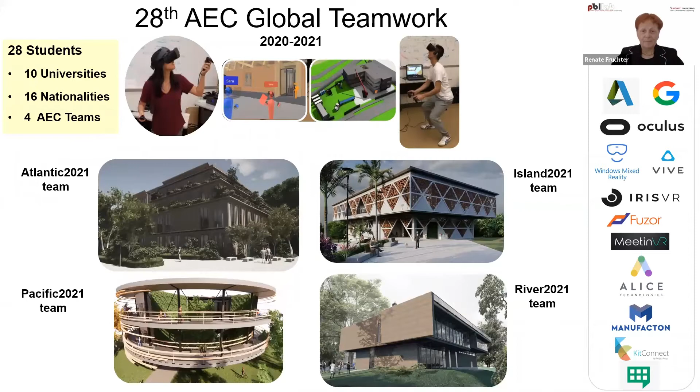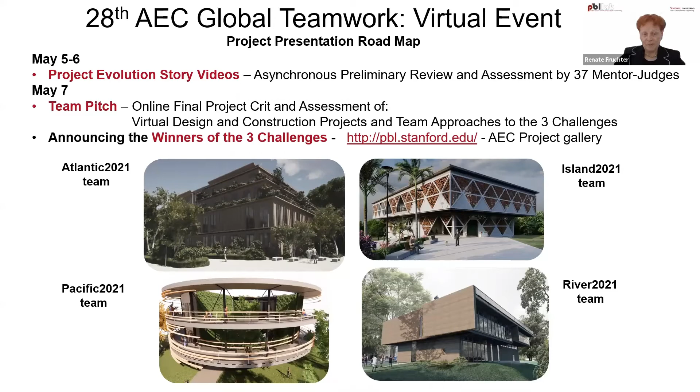In preparation for the virtual event, all 4 teams prepared project evolution story video presentations that were asynchronously reviewed and assessed by 37 AEC industry mentor judges. All teams then gave a TED-style short team pitch online to discuss their solutions with the mentors. To view all team presentations, please visit our PBL AEC Project Gallery website. I hope you will be inspired.

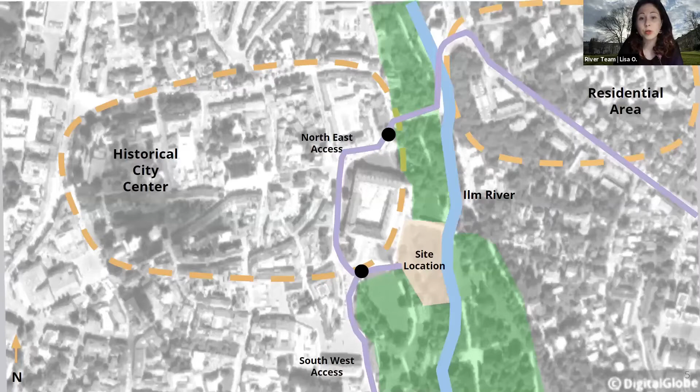However, this challenge encourages us to develop a small kit of parts with given dimension restrictions. The fact of the shallow water table was solved by using self-drilling micropiles and a waterproof concrete slab for the foundation. And by creating an earth embankment, we were able to bear the risk of flooding.

Our site has a breathtaking view to the river and the park. It is quite extroverted with a good connection to the other university buildings.

Our targets for the project are divided into 3 categories: design, user experience, and construction and use. They were there from the beginning, steering our design to life cycle process. Also, we created 3 icons for our interesting challenges. These will appear in black on the bottom left of the slide, provided the challenge is addressed with the presented content.

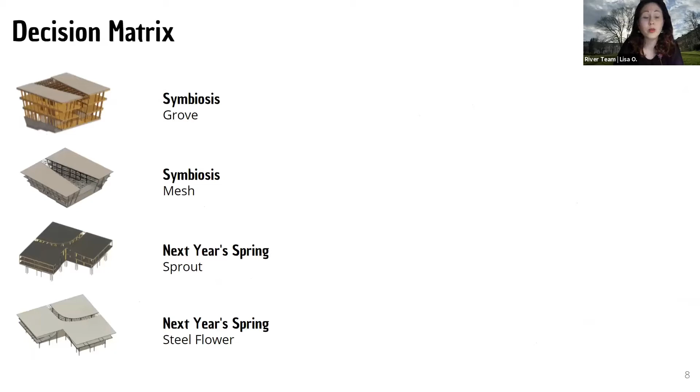The 4 concepts from the winter quarter were evaluated in a decision-making process, with the criteria sustainability, architecture, thrill, usability, and financing. The winner was next year's Spring Sprout, to which we will introduce you now.

Our building is located in the Goethe Park, and we were inspired by its founder Johann Wolfgang von Goethe, a Renaissance man, landscape planner, mayor of Weimar, and also a poet. One of his past poems is Next Year's Spring, referring to something new.

His verse inspired us for our design and led to our concept goals of bridging the gap between the past and the future. We connect to the past by passive measures, and we reach for the future by active measures and a sustainable process. A further approach for this connection is done by intergenerational equity.

But what is intergenerational equity? It is conserving fairness and resources for future generations. Equity in general can be a difficult concept to grasp, but when we dove into the literature, we quickly fell in love with the definition of intergenerational equity. With it, we can impact all 3 pillars of sustainability: the environmental, the social, and the economical.

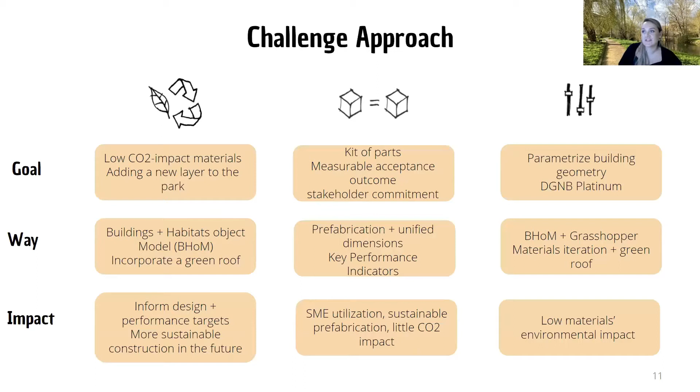So now we are showing you how we approach the 3 interesting challenges. For the equity challenge, we decided to work with low CO2 impact materials, and with our green roof, we added a new layer to the park.

For building as a product, we decided to develop a small kit of parts of our building elements and also introduce KPIs to measure the acceptance outcome. And for the parametric adaptability, we parameterize our building geometry, and by doing material iterations and including a green roof, we reach a DGNB Platinum.

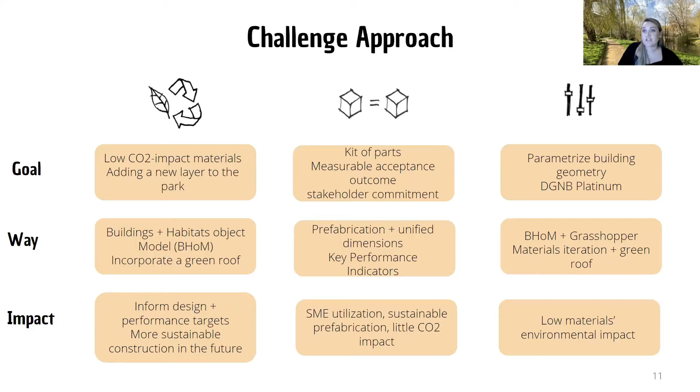One benefit of the public-private partnership between Team River and Riverbank University is the allowance for this involvement of SMEs in teaching the next generation workforce. The involvement will be through a 10-year PBL Lab established by the university that enforces the SME's Sustainable Prefab Product Library.

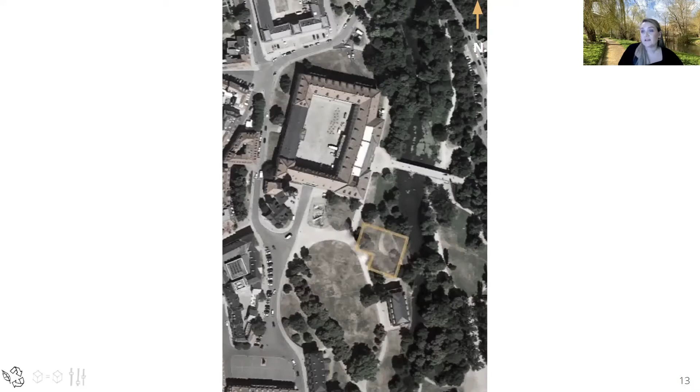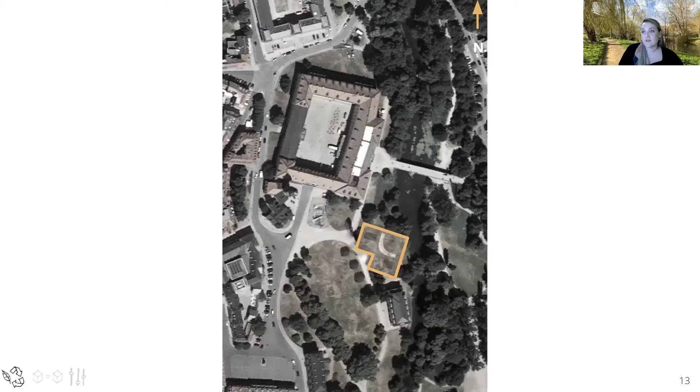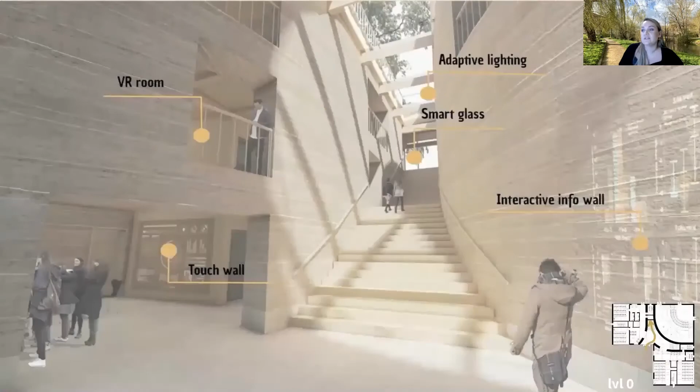And now we know where the building is, so let's take a look inside. On the right and left, you can see interactive information touch wall, where you can receive information about accessibility for people in wheelchair. If we follow the path up the stairs, we notice that the middle part allows us a lot of light and different shading.

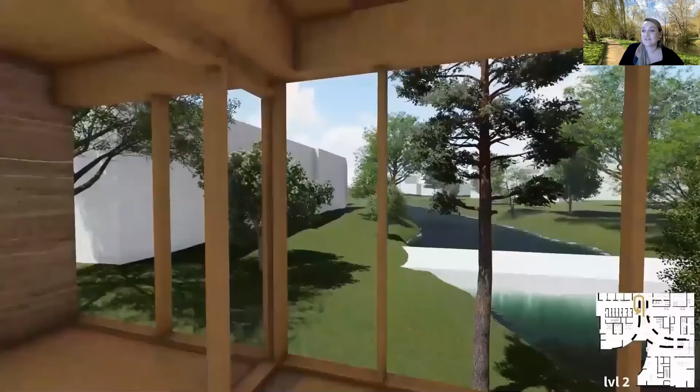And you can see curved load-bearing rammed earth walls from the past, which regulate the indoor climate. And if we go up through our fire protection glass doors to the upper student area, here more regular rammed earth walls are highlighting the gesture of framing.

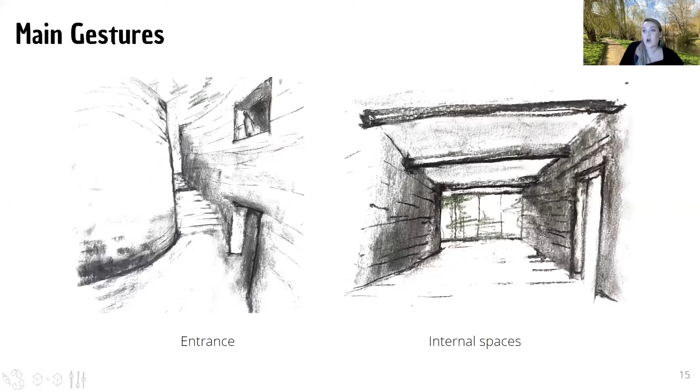So this illustrates the rationale of what we see as a dynamic and internal gesture in contrast to each other. On a quick overview of our architecture floor plans, we show you how the rooms are arranged around all levels. We use the wings for student and working areas, small and large classrooms, and the northeast for the auditorium.

We solve many integrational challenges together, and we are showing you selected ones. We use rammed earth for the load-bearing internal walls and CLT for shell walls and floor panels. We move away from using glulam for beams and columns and now use pure softwood instead. This material choice has a positive impact on our building's global warming potential as measured by the BOM. It also emphasizes how we connect the past with the future and incorporate old knowledge and experiences.

And in collaboration with our architect, we decided to follow a very regular structural system, which helped us stick to our small kit of parts.

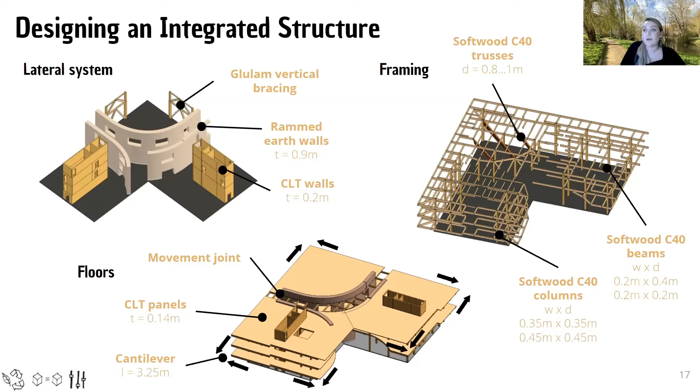And the MEP system selection was driven by the local environment, energy efficiency, and unique properties of the building. A ground source heat pump is our primary system due to its compatibility with our site location, and rammed earth physical properties enable us to use a secondary system previously not considered. So ventilation systems are tailored to the needs and shapes of the spaces.

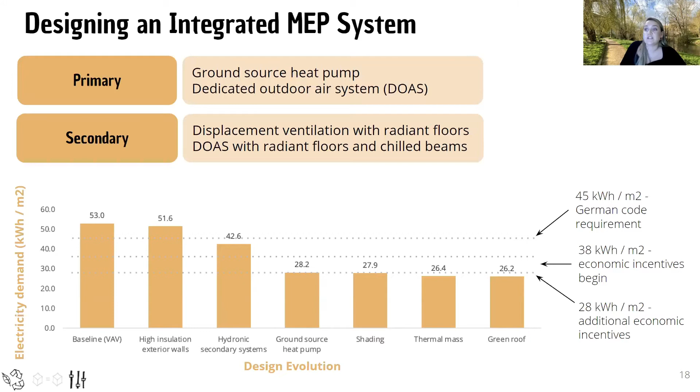Now we are located in the open student area on the second level, where students get a chance for informal interaction with professors, and they are also provided big and small open working areas. And this big glass facade opens up the view to the beautiful Goethe Park.

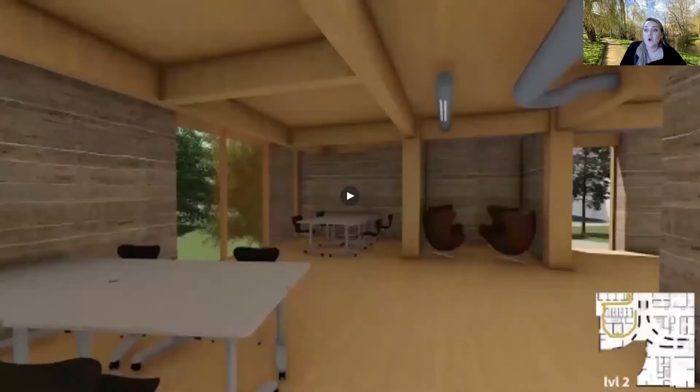We coordinated MEP and structure system by beam underpass and penetration, with consideration to only penetrate in the middle 50% of the beam span and middle 50% of the beam depth to avoid shear and moment critical zones.

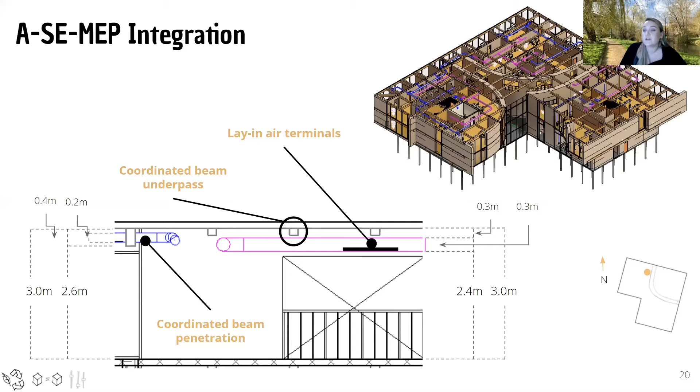We wanted also a minimum of 40% prefabricated items, including rammed earth walls, beams, CLT floor panels, columns, ducts, and curtain wall panels. So these materials are located in a product library stored at the university. Teams hoping to adapt the building to new usage or utilize rammed earth in construction will have the resources needed. So the next generation workforce made up of student interns will fabricate the architectural rammed earth walls.

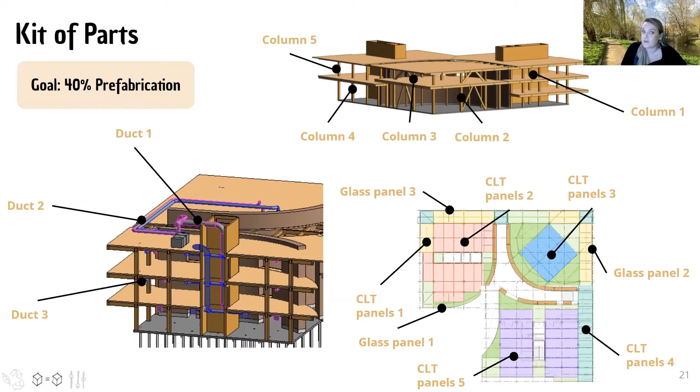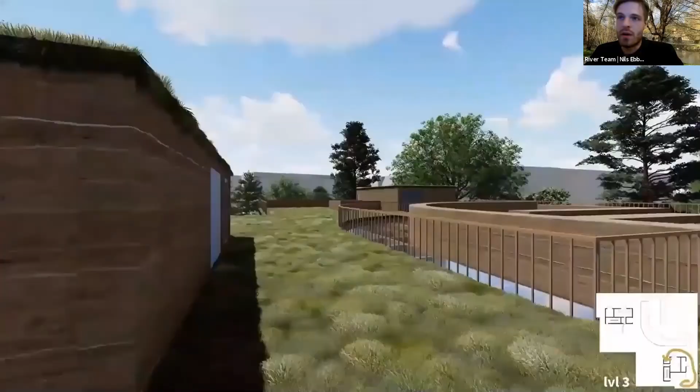All right, we will now continue our tour here on the roof. Here you can see that we are using this new layer of the park, and you get a new view of the area. The elements here are a continuation of the inside and the shade from the strong wind from the south.

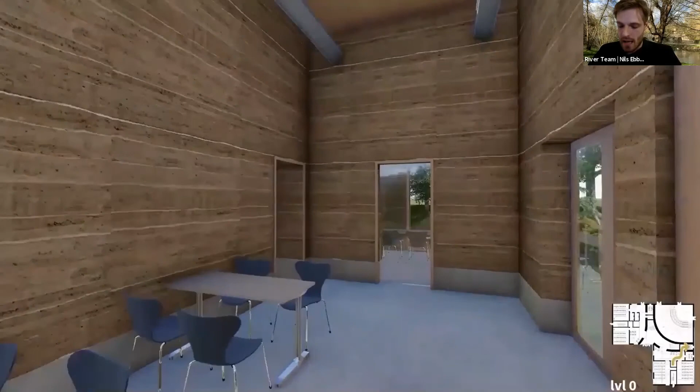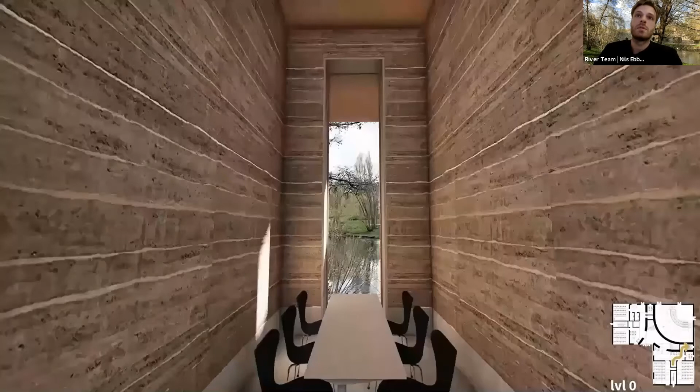As we go down quickly in the elevator here, we see these rammed earth walls again. Rammed earth is great because it helps control humidity in the building, and it has a large thermal mass which stabilizes temperature—a passive measure. It also has these layers, like layers of history, referring to the past, like in the grains of wood or in rock.

We also added this 40-centimeter layer of concrete at the bottom as a water table in case of flood or other water measures. As you can see, there are a lot of different spaces in this building for different people, which has been a priority for us.

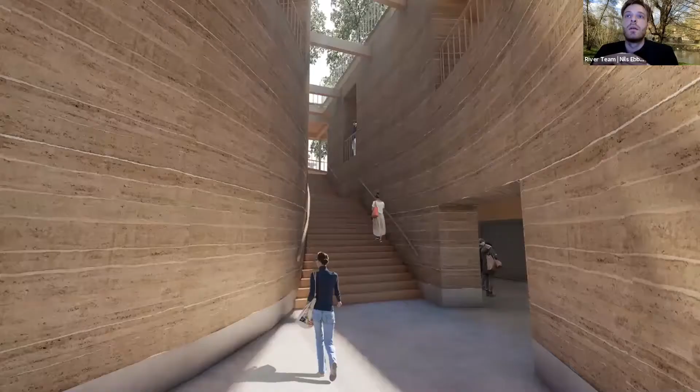Here you can see the entrance and how the gesture leads you along. But how do we actually build these rammed earth curved walls? We wanted to prefab them—in our case that makes sense because we had a quite wet climate with flooding, so we could not do it on site.

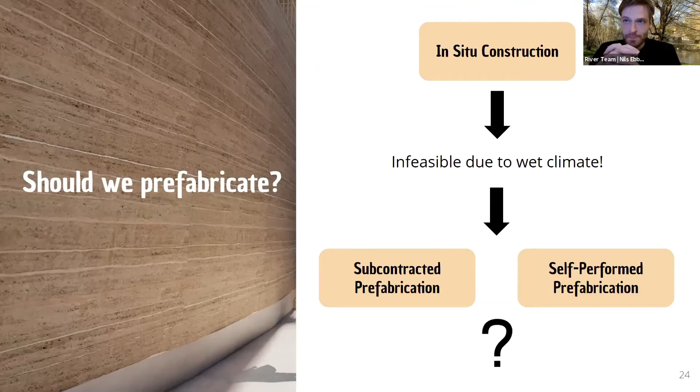But should we do it subcontracted or self-performed was then the next question. Through our KPIs, we found out that self-performed prefabrication performed much better.

Another aspect was that earth is pretty cheap, but making the formwork is not. So we wanted to optimize the building shape to make sure we could reuse the mold. We made sure the building was created from the same radius, so these big load-bearing walls have the same radius, built from the same ellipse.

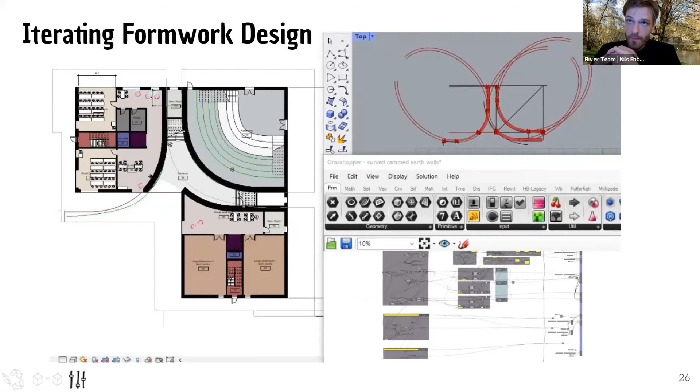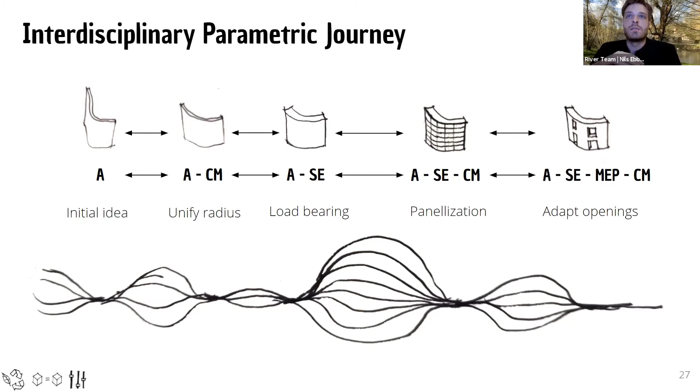Here you can see a sketch of how the parametric journey went and who was involved. It started as the initial architectural idea, and then we unified the radius of the ellipse. We made the elements load-bearing, so they became much thicker, then panelized the elements so they could fit size restrictions, and adapted the openings to fit for people, span, and light.

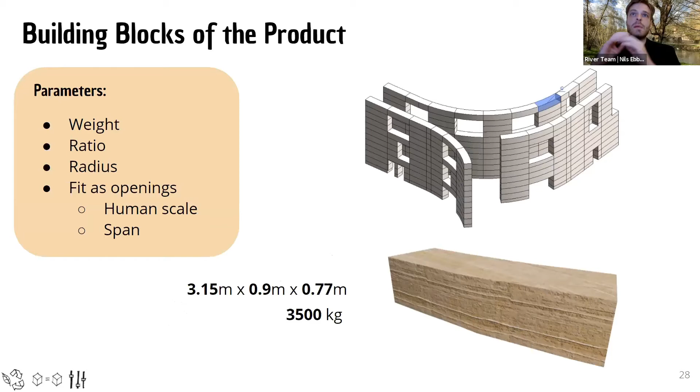Here you can see again some of the parameters, and also the final size and weight of the elements. And of course all of this fits together in the end so that people can actually stand there and enjoy the building.

Our process goes from procurement to closeout. It is centralized around the supermarket, which to us is home to the prefab packages from our SMEs, and also where the rammed earth wall fabrication takes place.

We then move into QA/QC for the rammed earth walls at Bauhaus University, which is central to the region. Rammed earth walls follow the same testing procedure as concrete, and that informed us about that decision.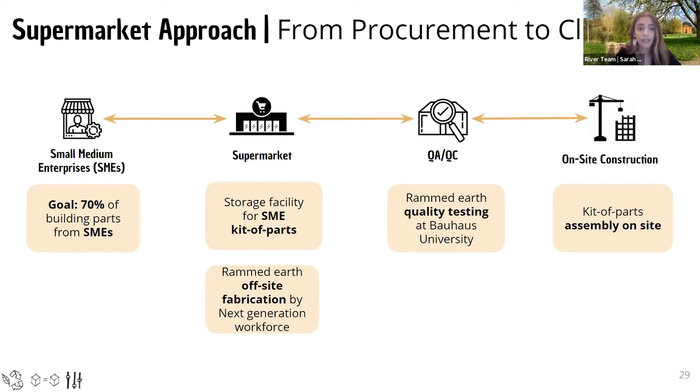The kit of parts for the SMEs and the rammed earth blocks are transported to the job site for crane assembly. Our first stop in the process is at the SMEs. Most of our suppliers are within 20 kilometers of the job site, and we chose ones engaged in prefabrication to take care of the kit of items, including curtain walls, sky roof, CLT panels, and MEP systems.

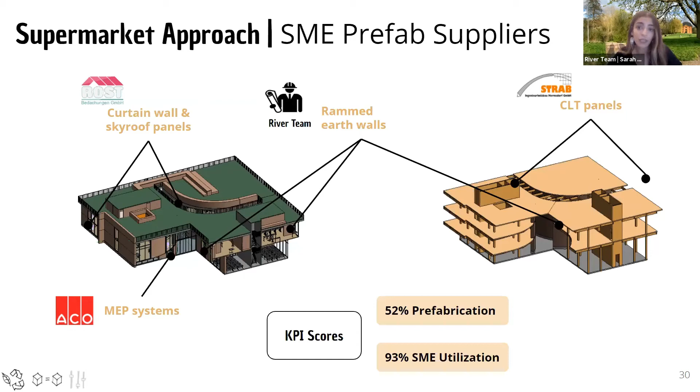Using this and the prefab rammed earth, we are at 52% prefabrication when our goal was 40%, and we're utilizing 93% of our building systems from SMEs when we were initially aiming for 70%.

Moving into the supermarket, which is only 5 kilometers from the site, we use Manufacton as our management medium. Manufacton is a program that links to the BIM models and acts as a centralized order and production tracking system. We can track the stages our supply chain is at with our prefab packages, and also monitor performance with the prefab rammed earth wall blocks.

It color codes the components in the BIM model and links it to the mobile app so it can be utilized by on-site personnel. As you can see, we are at 0.76 in our productivity factor, which is lower than the benchmark of 1.

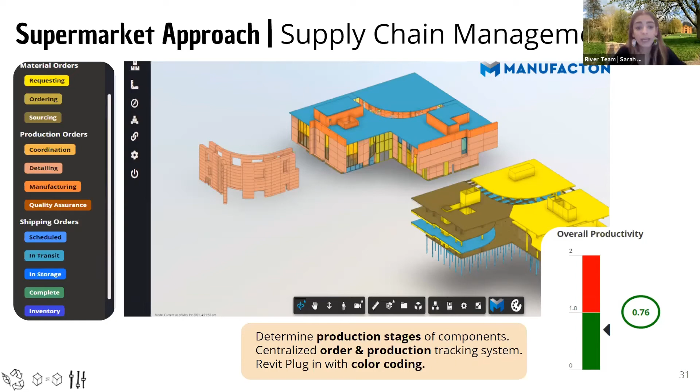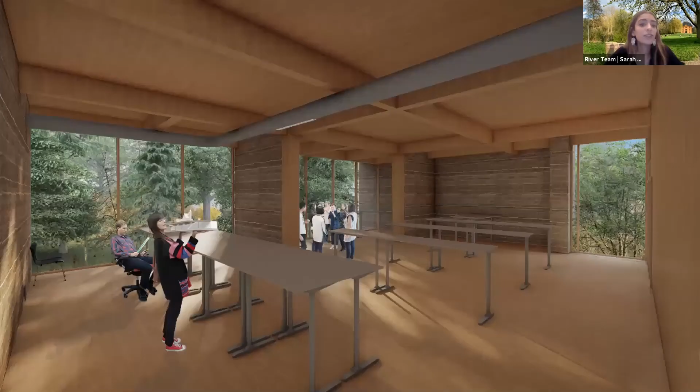Here's a visualization of the rammed earth walls to be constructed by the next generation workforce. We were committed to using natural materials in the building, so this disassembly for us is actually decomposition.

Lifecycle financial management is seldom applied in construction to its full potential. Through integration with our LCFM, we were able to use multiple optimized schedules through Alice, the AI schedule optimization software, and the procurement dates from Manufacton to find the best value for money through liquidity planning.

But what is liquidity planning? A liquidity plan is used to divide loans over a known period of time. When there's no liquidity plan, for us, the interest paid was almost twice as much.

Comparing the top 3 optimized schedules from Alice, we found that option 1 with 2 curtain wall crews is the winner. We were able to save 21,000 euros that would have been paid with no value added.

Our next step was to look at the risks in and out of construction. Focusing on the accepted risk in construction, we gained information about their impact and probability of occurrence through surveying methods. The 2 main accepted risks were flooding and the next generation workforce.

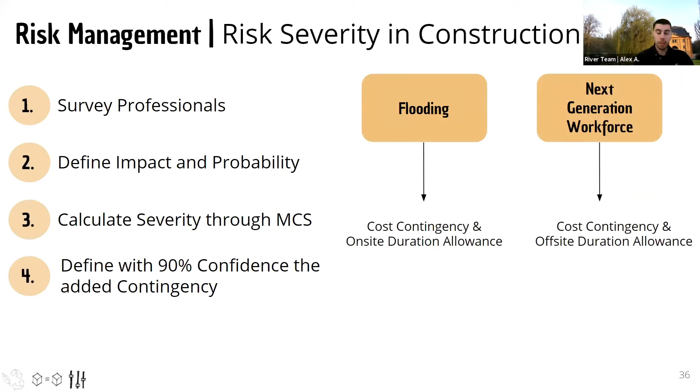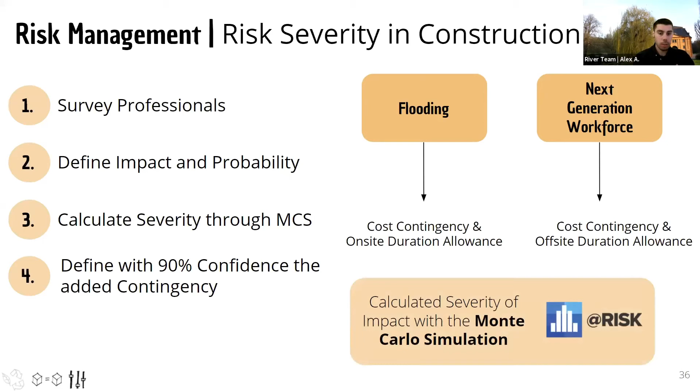Their impact and probability were then divided across different work packages, and triangle distribution was applied to them. The resulting probability and impact were then multiplied together to get the severity, which could be predicted with a Monte Carlo simulation. Here we can see that at the 90% confidence interval, the cost contingency is 5%.

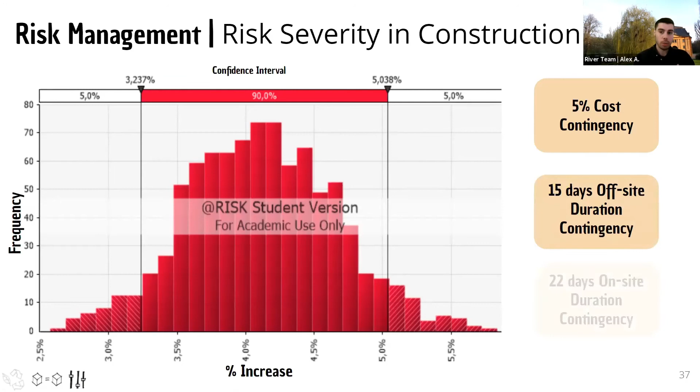We also found the duration contingency for offsite to be 15 days for the rammed earth walls fabrication. And the duration contingency for the on-site construction was chosen at 22 days to account for the event of flooding.

Before we take you to the on-site assembly, here is a peek at our intelligent interoperability in our design for manufacturing and assembly. In construction, we integrate Alice and Fuser to investigate scheduling and logistics, Manufacton to optimize productivity and track the supply chain. After that, we move into lifecycle with liquidity planning and risk management, which informs supply chain and construction.

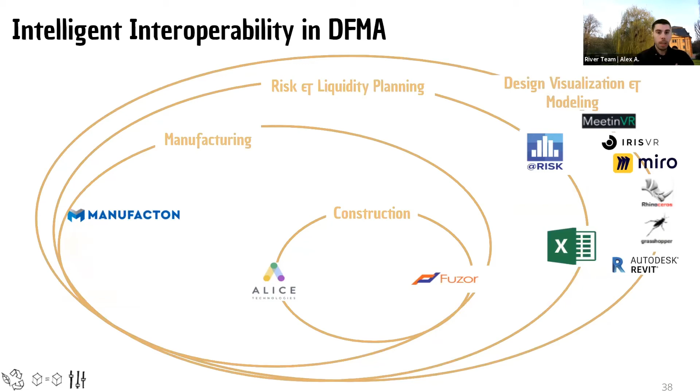In turn, this iterates the design through visualization in MeetinVR, Miro, and IrisVR, and modeling in Rhino, Grasshopper, and most importantly Revit, which combines most of the technical software we use. Using all of these, we created our 5D green design for manufacturing and assembly.

The concept of intergenerational equity exists in construction by using renewable energy through permanent on-site generators that provide power for our electricity construction equipment.

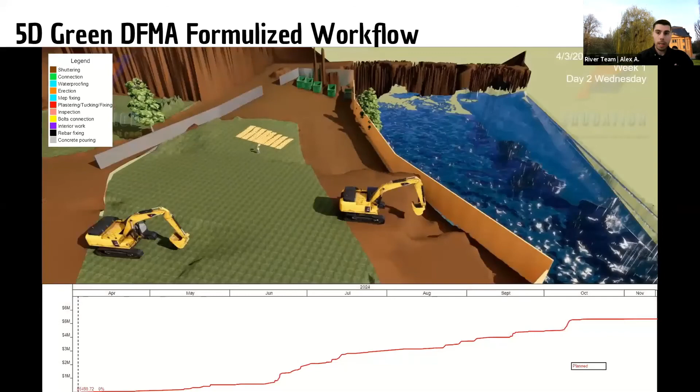Then cranes, after unloading the trucks, place the elements at the correct position. The tower crane can reach all the building's footprint, whereas the mobile crane can reach 2/3 of it.

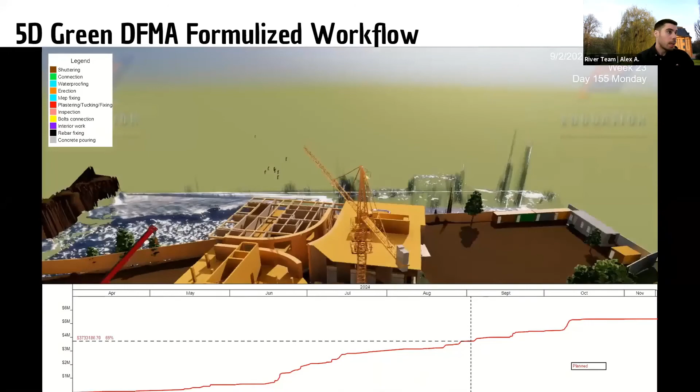Here is also displayed the flood event, how the construction stops during flooding, and the site is secured by flooding barriers. Afterwards, the remaining actions take place for the fulfillment of the construction process.

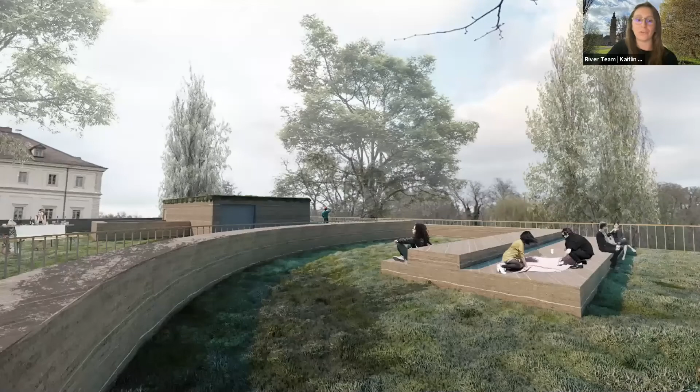All right, let's take a quick pause on our green roof before we discuss how our building performed against goals and targets. We tracked our green building performance against the DGNB standard. DGNB stands for Deutsche Gesellschaft für nachhaltiges Bauen and is the German equivalent of LEED.

We achieved a platinum certification through key design changes such as the green roof, utilizing softwood structural framing, a change driven by BHoM results which we'll discuss later, and implementing a liquidity plan responsive to ALICE schedule data, as well as green construction, which put in place pollution plans and low noise electric equipment, the way that Alex just discussed.

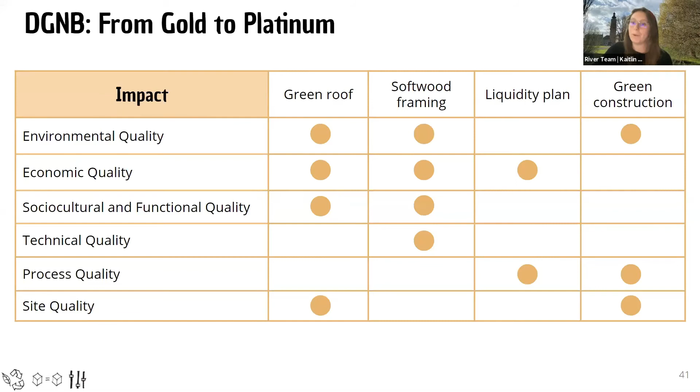We monitored the environmental and financial impacts of proposed design changes using the sustainable target value and target value design tools. For example, we considered switching from 3D printed concrete slab to CLT slab for design and constructability reasons. We confirmed with the STV and TVD that this change kept us within our targets.

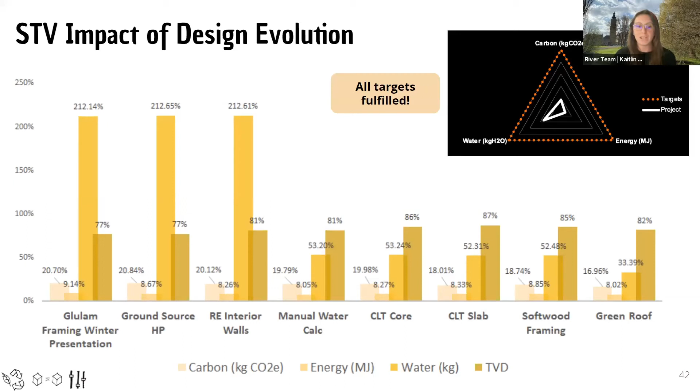The STV helped us understand the trend of environmental impact through design, though many of our specific materials were not available for deeper analysis. To better understand the impact of these materials, we used the Buildings and Habitats Object Model, or BHOM, Lifecycle Assessment Toolkit.

This enabled us to understand the embodied global warming potential of our actual materials against the evolving geometry of our building. We analyzed 576 material combinations by parameterizing live Revit geometry, utilizing the BHOM to transfer it to Grasshopper, and varying material options for slab, core, interior and exterior walls, and structural framing.

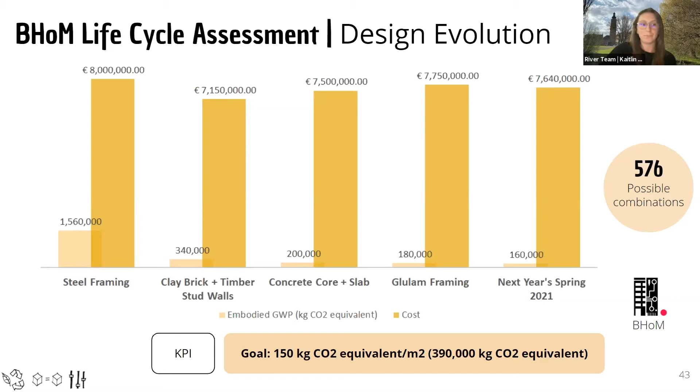As providing a cost-effective building to our owners was a key goal, we evaluated the impact to the TVD before finalizing materials changes. Let's dive deeper into our TVD performance.

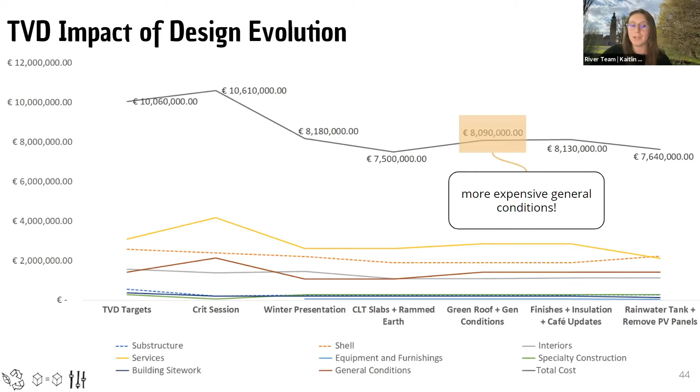This increased our cost a little, but with further updates, such as the removal of the photovoltaic panels, the cost dropped to 7.6 million euros.

Based on the framework of our PPP contract, we estimated our annual rent. We used a rough estimate of the annual cost for maintenance and operation to set an approximate target value.

As earlier discussed, the STV and TVD were continuously analyzed and ultimately impacted our final life cycle cost of 18.6 million euros.

All right, wrapping up the challenges. For the Building as a Product challenge, we want to point out our three main approaches. Using sustainable industrialization and stakeholder commitment, we were able to achieve our set KPIs with 93% small-medium enterprise utilization for regional identity, 52% prefabrication, and 62 kilograms per square meter carbon dioxide impact.

Moving on to the parametric adaptability challenge. We used Grasshopper to panelize our rammed earth elements so we can use the same formwork for all our curved walls. To adapt to the challenge of moving up the LEED or DGNB evaluation, we assessed our material selections with

the BHoM tool to see what impact different materials can have. Furthermore, we created the aforementioned liquidity plan to save on interest costs with the AI created schedule.

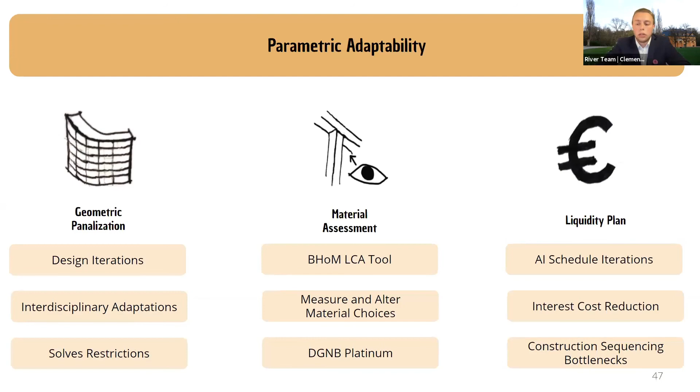Finishing the challenges with the equity challenge. For the equity challenge, we want to point out our three approaches. Of course, our idea to connect the past with the future within intergenerational equity.

Also, the integration of the project into the regional culture and avoiding having a negative impact on the future. With that, we're using student workers and, for example, the green roof for a more regional impact.

So moving to the technology we used, we created this chart to show you what kind of softwares we used and what matters. Some softwares were used by just certain disciplines, others had impact on the whole team and were used on a regular basis.

For instance, we would like to name Meet in VR here. As we never met in person, this VR software we used pretty much every week for our meetings and our stand-up reports, and it helped us to feel a little more connectedness.

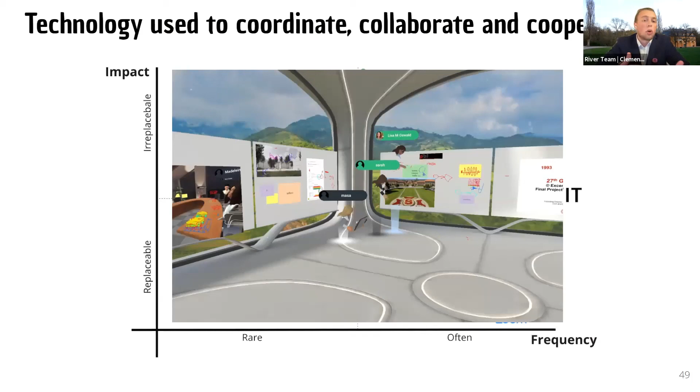Another software we want to point out is Miro. Miro is an online sketch board or sketch wall, and it helped us really in the early stages of the project with brainstorming or problem solving.

And now let's move into kind of a regular week of our lives here in the course to show you how we dealt with our planning. So we started off with Nialli Visual Planner.

It's an online pull planning tool. So with that, we can set deadlines or see what our duties are for the week.

Our communication is mainly over Discord, but also for meetings, as we just mentioned, Meet in VR was a big thing. Of course, now here we are all in Zoom.

So for having an issue, we started off in Miro, this online sketch wall, to start sketching on ideas. Then we went into Revit to really draw these ideas onto the board.

And then we pulled the data out of Revit, analyzed this over our common OneDrive folder in Excel. Again, a very important tool here to see if all the data add up and add up with the cost

we set. If that all adds up, we go back into our building with Iris VR to really get a feel for the building and also, of course, do a soft clash detection.